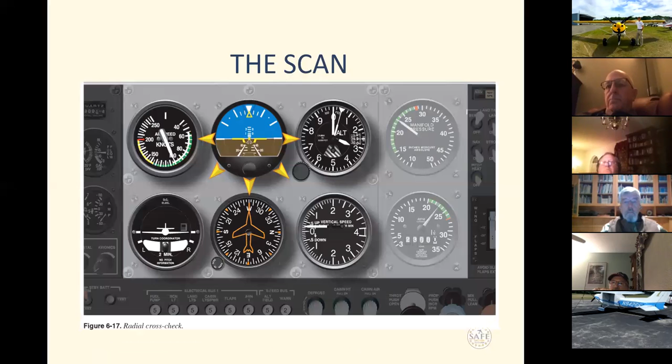It might be the radial cross-check, going back and forth. Some call this the musical checklist. This includes altitude and heading as well, and coordination, airspeed. That's certainly a little bit better.

It might be the rectangular cross-check. The fact of the matter, all of these things are designed to keep the non-instrument rated pilot safe if they have an unintended IMC experience. The problem is, in the training, we don't really get quite often to the scenarios.

I'm also an examiner, Dan. I don't know whether you mentioned that or not. I am an examiner, and on many private practical tests, in fact all of my private practical tests, I create a scenario for the IMC work, for the hood work that they're going to have to do.

I create a scenario that is very typical of what we've seen in the databases of how people inadvertently get into IMC. Typically lowering ceilings, lowering visibilities. The pilot is endeavoring to get to their destination, whether it's get home or wherever they might be going. They're slowly descending, the visibility is getting worse and worse and worse. They realize they go any lower they might hit something, they level off, and now they're inadvertently in the clouds.

The typical response that is taught by virtually every instructor is to do a 180-degree turn. That is what has been taught for years and years and years.

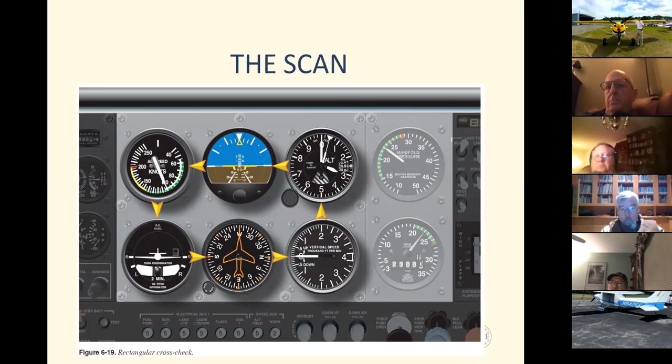I'm happy to say that the FAA finally - it took a lot of fighting from me and a lot of arm twisting - but I got them to agree that we really need to consider what I consider the most important things to stay alive if you have an unintended IMC encounter. I call them the 5 C's.

The first thing, get calm. Typically, and I think many of you might have seen the AOPA video, it's a great little video called 178 Seconds. That's about how long it takes for a pilot to lose control. The important thing is to stay calm, take a couple of breaths, get on the gauges, and get control of the airplane. Get straight and level, get it trimmed up.

The next thing is, we all know that there's nothing as useless as altitude above us, runway behind us, and fuel still left on the ground, but there's nothing as useful as altitude below us. Add power - if you're trimmed up, adding power will create a climb. Back as a student pilot, if you were really taught properly to do constant speed climbs and descents, nothing about rates, all you had to do was constant speed. If you were trimmed, trim will maintain an angle of attack.

In level flight, our thrust equals our drag, our lift equals our weight - there we have level flight. If we just increase power, that excess of power will lead to a climb at a constant speed. So climb, get away from the terrain. That's the first thing you need to do after you've gotten control. Get straight and level, trim, add power, the airplane will climb. We don't have to worry about rate, about Vx, Vy, anything like that. Adding the power will get the airplane climbing.

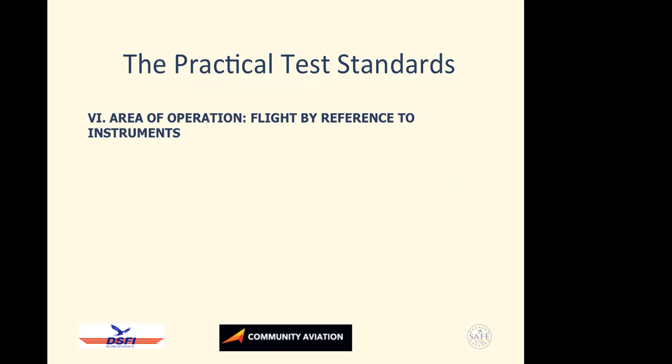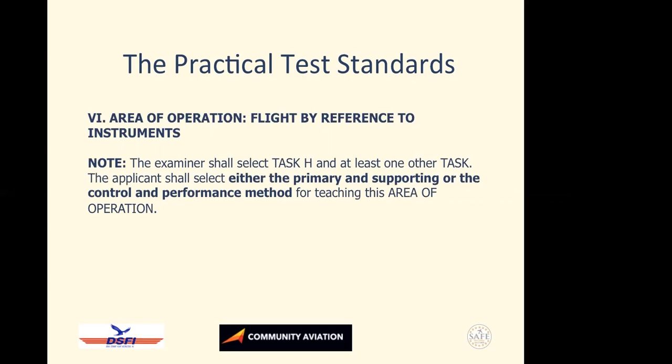But the practical test now for the instrument instructor says that for flight by reference to instruments, they have to teach either the primary and supporting technique or the control performance method. I've found that many pilots, and sometimes even instructors seeking the instrument instructor rating, are not sure exactly what primary supporting or control performance methods are. So I'd like to run through those pretty quickly here, okay?

For primary supporting, as an example, here's our 6-pack of instruments plus some power instruments. For straight and level flight, what is the primary instrument that we need to sustain straight and level flight?

So many people on a practical test with me, whether it's for instrument or even for the instrument instructor, will say the attitude indicator, because that's probably what you were taught back when you were a student pilot. But the fact is we have to maintain altitude when flying instruments. Thus, the altimeter becomes the primary instrument for pitch in straight and level flight. It is supported by the attitude indicator, the airspeed indicator, and the vertical speed indicator.

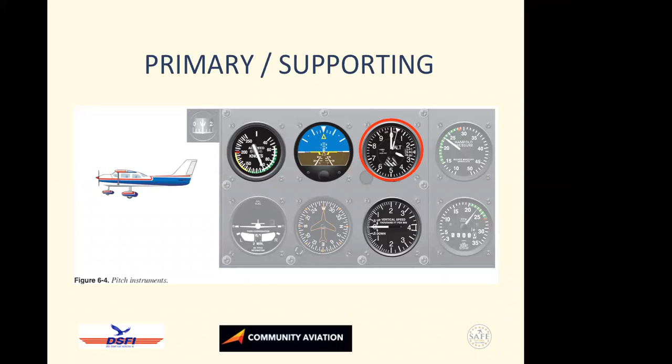What about bank in straight and level flight? Again I hear the attitude indicator, again referencing back to what they learned as a student pilot. But the fact is we have to maintain a heading, whether it's in vectors or to stay on an airway. The directional gyro, the DG, the heading indicator, or the HSI is the primary instrument for bank in straight and level flight. It is supported by the attitude indicator and the turn coordinator.

When we get to primary instruments for power, it's either the manifold pressure gauge if you have a constant speed prop, or just the tachometer if you have a fixed pitch prop. It is supported by the airspeed indicator.

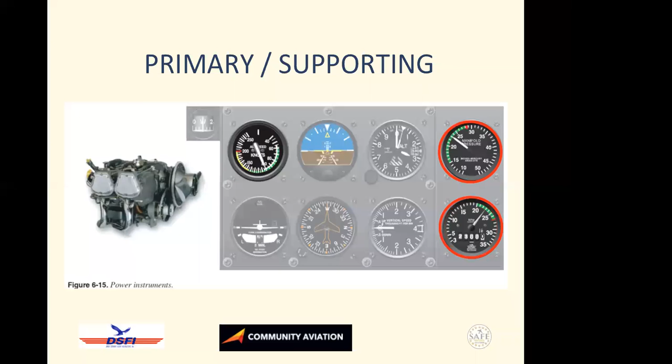And when it comes to trim, well, we can trim in 3 different axes depending upon the airplane. If you have a Cirrus, or you're flying a multi-engine airplane, you're going to be able to trim your ailerons. But for most of the airplanes that the majority of us are flying in single engine GA, we can trim the elevator, we can trim the rudder. The primary instrument for trimming the elevator is indeed the attitude indicator.

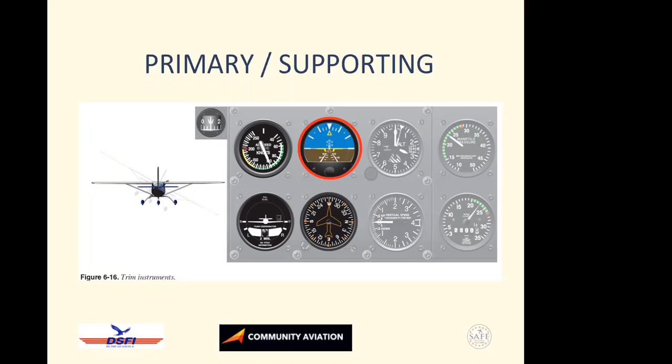Finally, the attitude indicator is primary for something. So the attitude indicator is primary for trimming the elevator, and the inclinometer—that ball down there, or the sailboat if you're flying with glass—is primary for trimming the rudder, or for yaw. If you do have aileron trim, as you might in a Cirrus, again the attitude indicator will become primary for that. Supporting these trims are both the airspeed and the DG or the HSI.

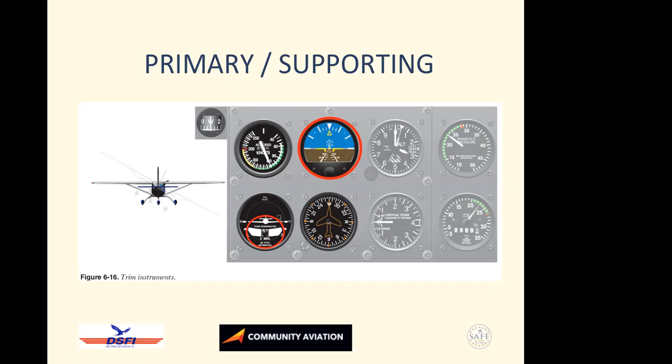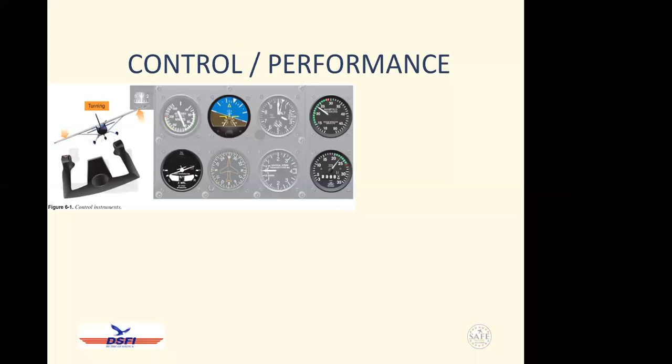So now what about control performance? What are we talking about there? Primary control instruments are the attitude indicator, the turn coordinator, and our power instruments, manifold pressure and tachometer. Our primary performance instruments are the airspeed indicator, the altimeter, and the vertical speed indicator.

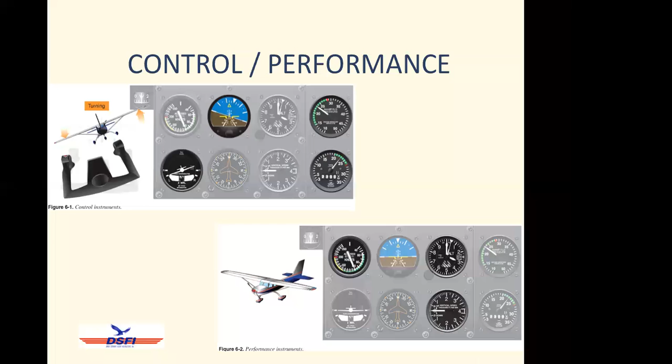But to do control performance, we also need to know the numbers. And it's surprising to me that I have instrument applicants for the instrument practical test to get their rating who don't know the numbers for their airplanes.

The other thing is, many of you might know that I conduct instrument training trips up and down the East Coast. One of them is called the East Coast IFR Experience. It's a 5-day trip starting at Columbia County.

We go all the way down to Florida, come all the way back up the coast to Maine, to Bangor, and then back to Columbia County. When pilots are coming in their own airplanes, which I highly recommend, because that's what you want to train in, do you know the numbers for your airplane?

I can kind of see deer in the headlights when I ask pilots this personally. They don't know what I'm really talking about. But with the numbers, what I'm talking about is that every combination of pitch, power, and configuration will yield a known performance. It's irrefutable. This is physics, okay?

As an example, for climbs, when I want to climb in my Cardinal, my power is always going to be set. I fly climbs with wide open throttle. I do fly a turbocharged 182, a T182T. There, I have a limit on wide open throttle of 5 minutes, and then I have to pull the power back.

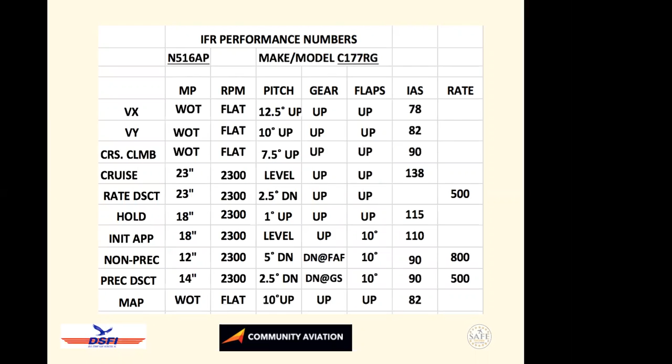Perhaps you're flying an airplane with a fixed pitch propeller, such as a 172. And here's a matrix for the 172. You might see that it says sim, and I borrowed this courtesy of a very wonderful young instructor by the name of Ryan Koch. He's with pilotworkshops.com. He has a great program called IFR, The Missing Lessons. I highly recommend that course to virtually everyone, whether you're an instrument pilot, working on the instrument rating, or especially if you're working on the instrument instructor. It's a fantastic course to look at. At any rate, here we see the different ways that we can configure our airplane, the power settings that we'll need, the pitch settings, and the different kinds of performance that they would yield.

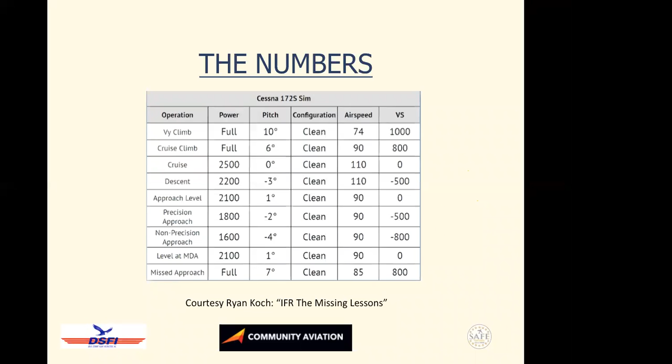So now I come back to which do you use? The PTS said either primary, supporting, or control performance. And I gotta say, what a crock. Because the fact of the matter is, I use them all, and I certainly teach them all. Primary, supporting, control performance, the answer is, it depends. And it depends upon what I want to achieve.

So I just talked about it as an example. If I want to achieve a best rate climb, I know what to do. If I want to descend when I'm on an approach, we'll use these. And as we go through this program, at the end, I'll be showing how I use all of this to fly an approach in Columbia County. But this makes me think that one of the more critical times we really have to be aware of all of this is in the missed approach. The missed approach is a very dangerous time in an IFR flight. Many pilots have come to grief, losing control in the missed approach.

It's perhaps the most dangerous time of an IFR flight. So what I'd like to do is show you a video from my East Coast IFR experience of a missed approach. This is going into Martinsville. It was the first day, the fourth approach of the first day of the East Coast IFR experience. Let's take a look and see how we use those numbers.

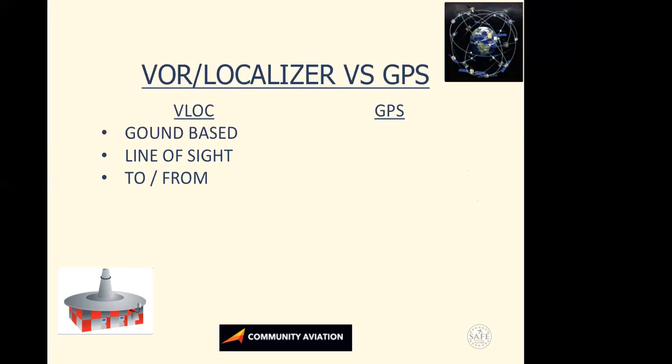And we could navigate to or from a VOR, or for that matter, a localizer. For those of you who've been flying IFR for a while prior to GPS, quite often to get established on a localizer or an ILS, even a VOR approach, we might fly to an outer marker, a co-located outer marker. We found our way there using our ADF—there was an NDB at that outer marker as well. We would then fly outbound with a from indication on the localizer, getting reverse sensing, do our procedure turn, and then come back in. So we could navigate to and from these nav aids.

The sensitivity of all of them was, and still is, angular—not was, they're still out there, they still work, a few of them. It's an angular sensitivity: the closer we are to the transmitting antenna, the more sensitive our needles will be. We'll get more into depth on angular sensitivity for VORs and localizers a few slides later on.

They are also, or at least the VOR, can be used as a resolver. What I mean by that is, back in the day, and for that matter even now, every once in a while I get an applicant for an instrument practical test filing slant uniform, just two VORs. So ATC might say,

clear direct the ABC VOR when able. What you would do is put in the frequency, listen to the Morse code, identify it, make sure it was the right one, turn your omni-bearing selector or your HSI until you got a TO indication on your ambiguity indicator, and then center the deviation bar until it was centered, and that would resolve your navigation problem—that would be the bearing to the VOR. We could resolve those issues.

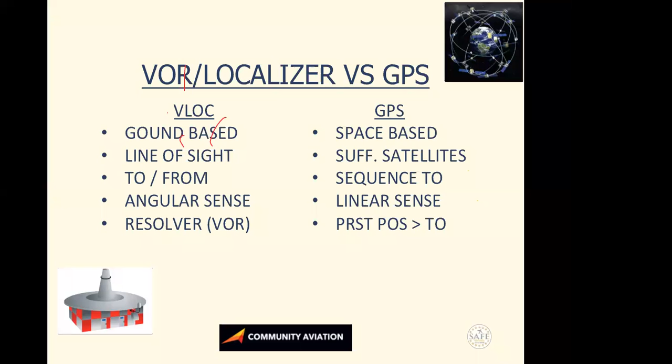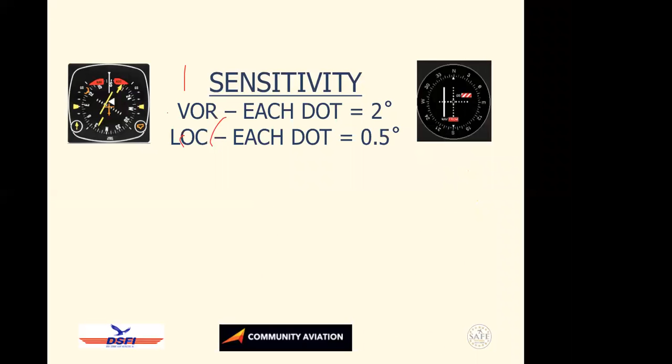So the basics of VOR versus GPS. Let's talk a little now about the sensitivity. In VOR, each dot on our omni-bearing selector or HSI typically equals 2 degrees. In a localizer, it is 4 times as sensitive - each dot is half a degree. So if we had a 2-dot deflection on the VOR, we'd be 4 degrees off course. In the localizer, we'd only be 1 degree off.

At 60 nautical miles for the VOR - and this is actually plane geometry, applicable to both VOR or localizer - at 60 nautical miles, every degree is 1 mile apart. Envision a bicycle wheel with spokes coming out of the hub - the hub might be the VOR. If the rim of this wheel is 60 miles from the hub, each spoke being a degree would be 1 mile apart. If that rim came into 30 miles, each degree would be half a mile apart. At 15 nautical miles, each degree is only a quarter mile apart.

Back in the day when I was learning to fly, I didn't have an airplane with DME. I'd always use cross radials. Quite often I'd find VORs that might be 30 or close to 30 miles offset to the side. For example, when I used to fly the VOR 13 into Bennington, Vermont, the Cambridge VOR was just about 30 miles from Albany. So when I saw I had 10 degrees to go, I'd use my number 2 nav omni-bearing selector. When I saw I had 10 degrees to get to that crossing radial across Cambridge, I'd know I was 5 miles away - things of that nature.

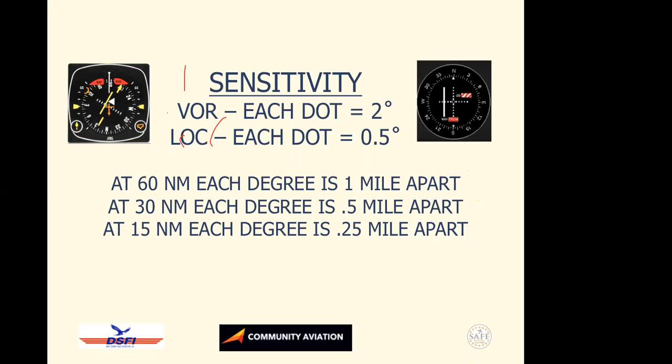So knowing this is still helpful for those of you who might be flying glass and have bearing pointers. I personally am using my bearing pointers on my Aspen all the time, and I still use this kind of stuff, even though I've got all that other information available through my GPS.

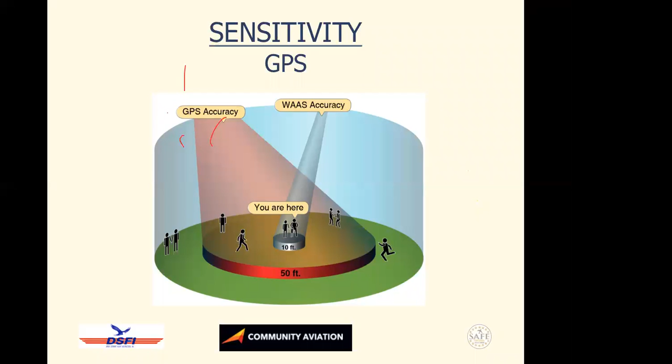Let's talk a little about GPS sensitivity. If we have a non-WAAS GPS, when it gives you a lat-long coordinate, it's actually going to have you within 50 feet of that coordinate. If we have WAAS-enabled GPS, it's only 10 feet. For those of you flying with the 406 ELT hooked up to a WAAS-enabled GPS, when it sends out your position, whoever it might be - the CAP, Civil Air Patrol, whatever - when they get to that point, they could land in a helicopter, turn 360 degrees, and they would see you within 10 feet of where they landed. So WAAS accuracy is much, much greater.

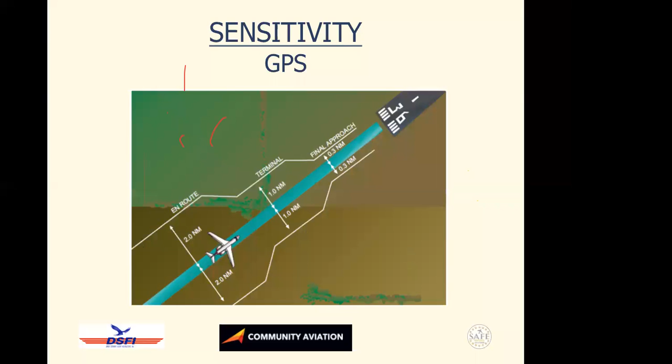Talking about sensitivity of the GPS, we have those 3 basic modes: en route, terminal, and final approach mode. It's also important to know when it's going to go into those different modes. Let's look in greater depth at what those are.

Terminal mode, which is basically where we would start in an IFR flight - when we are in terminal mode, the CDI from center to full scale deflection will show you that you are 1 nautical mile off. So from full scale left to full scale right covers a 2-mile wide course.

Question becomes, when are we in terminal mode? It is for the first 30 nautical miles of the flight if our first waypoint is within those 30 miles.

If you're a VFR pilot using GPS as a go-perfectly-straight tool, you want to fly to lunch somewhere, that $200 hamburger run to a restaurant that's 100 miles away.

When you put in that waypoint, your GPS starts in en route mode. If it's WAAS enabled, from center to full scale deflection will be 2 nautical miles, or full scale to full scale, 4 nautical miles. If you're a non-WAAS GPS, it would be 5 nautical miles from center to full scale deflection, or 10 miles width of your course.

Now again, if your first waypoint is less than 30 miles, as it will be in virtually every IFR flight, your first fix, whether you're doing an ODP, a SID, whatever it might be, I'm guaranteeing that fix is going to be somewhere between 2, 5, maybe as a max 10 miles away. Your GPS will start in terminal mode, 1 mile center to full scale deflection. When you get 30 miles away from your departure, it will switch to en route mode.

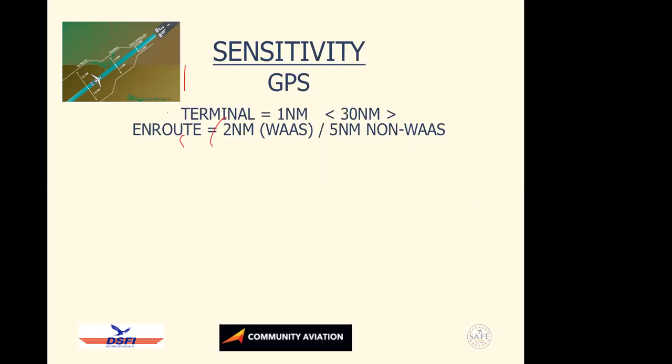The last mode we have is approach mode. There are a variety of different types of approaches we might possibly get. If you have a non-WAAS GPS, the only approach you're going to be able to get is an LNAV approach. We'll talk more about the details of these in a little bit, so hang tight.

However, if you have a WAAS-enabled GPS, there are 6 different types of approaches you could get. You could potentially get an LPV. You could get LNAV VNAV, which does require a baro-aided GPS. In all the years I've been flying GPS approaches, starting back in 1994 when I got my first Garmin 430, I've only flown 3 LNAV VNAV approaches.

So LPV, LNAV VNAV, LNAV plus V, LNAV, LP, and LP plus V. That's 6 different types of approaches.

3 of them have angular sensitivity from the final fix inbound. 4 of them have vertical guidance, but only 2, the LPV and the LNAV VNAV, have vertical guidance to a decision altitude. The other 4, LNAV plus V, even though it gives vertical guidance, still goes to an MDA. Same thing with LNAV. LP is angular. LP plus V gets vertical guidance, but again only goes to an MDA. Hang tight, I'll explain why in a few more slides.

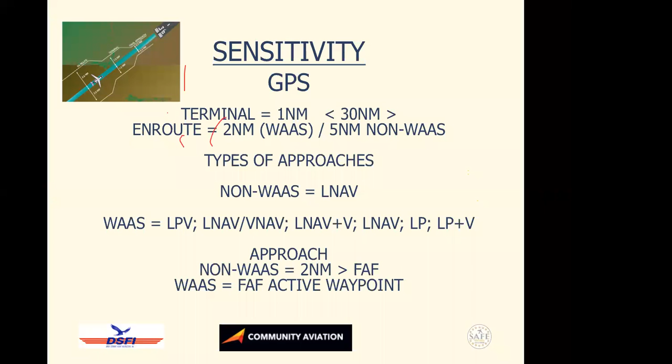So anyway, remember, you're going to find out the type of approach when the final fix becomes the active waypoint. You might have even heard me in that last video clip coaching Billy, saying, well, when are we going to find out? And he said at Luigi, well, no, that was not the final fix. When we cross that, the final fix becomes the active waypoint, that's when we would find out.

I'd like to now compare the localizer with the LPV, localizer performance with vertical, or localizer precision with vertical. On virtually every instrument practical test that I give, folks who are anticipating come to me for a practical test, take your notes now and you won't miss this question.

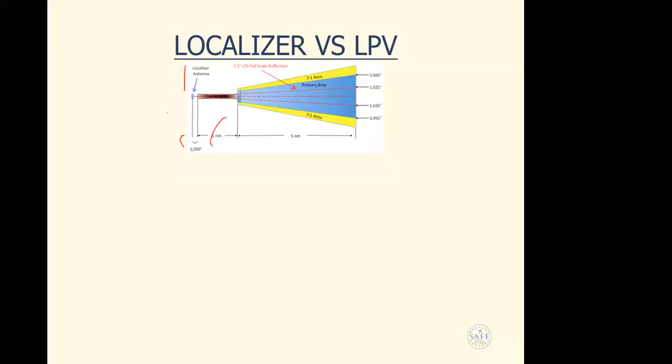How wide is the localizer at the threshold? There's only one answer to this. You can't hem and haw. The localizer is designed to be 700 feet at the threshold. This is applicable not only to a localizer and or ILS, but also to the LPV and the LP and LP plus V approaches. Those needles, when you get down to the threshold, from full scale deflection left to full scale deflection right, going to be 700 feet, 350 feet either side of the localizer.

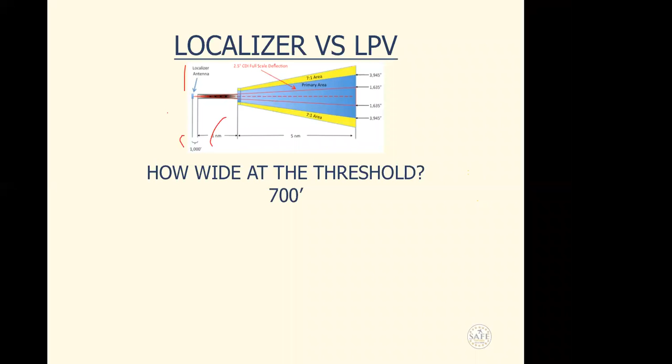So my next question in the practical test says, well, how wide is it going to be at the final fix? And I typically kind of see deer in the headlights, kind of wondering about this one. Yikes, gee, I don't know. And if they were wise, they'd say, well, it depends. And it depends whether it's a localizer or an LPV. In the case of an LPV, it's always going to be fixed. I'll tell you what that is in just a second.

But for the localizer itself, it does depend on several things. Number one, it depends on how long the runway is. We have to understand that the localizer antenna is positioned at the far end of the runway that we are approaching, and it is typically placed anywhere between 500 to 1,000 feet from the far end of the runway. It now goes out angularly at anywhere from 3 degrees to 6 degrees to be 700 feet at the threshold. Well, that certainly depends on how long is the runway. We have ILSs to runways as short as 5,000 feet. We might be going into somewhere like Stewart in Newburgh. We might be going into Bangor.

We might be going into Portsmouth, we might be going into Plattsburgh. There are all these military runways that are 12,000 feet long. If it's 12,000 feet long, that localizer is going to be much wider wherever that final fix is. So the length of the runway has something to do with it. The other thing is how far from the runway is that final fix. It might very well be at an outer marker, as an example. So it does depend on how far.

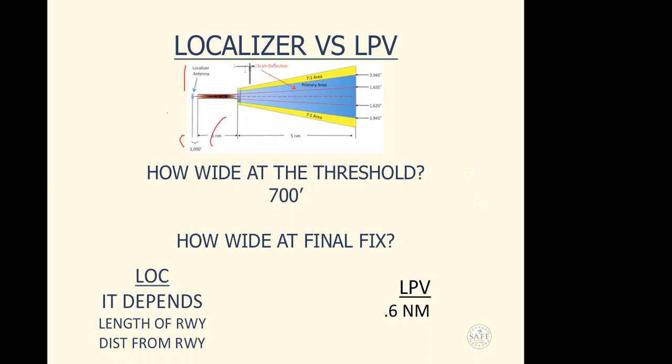It gets no narrower. What if there is a crane sitting there just a half a mile from the threshold of the runway? It is outside the angular deflection for the localizer, but it is inside that 3/10 of a mile. And if you are not keeping the needle completely centered, maybe you got a 3.5, 4-dot deflection, in the localizer you'd still be protected, but if you were flying an LNAV, you would not be protected.

Maybe it was a tree, and you could easily run into those obstacles or obstructions. In the LP plus V, the purpose is that you might have flown an ILS that has a visual segment that finishes the approach. So the LP plus V is very similar to that.

An example, I just flew one the other day in IMC, right down to minimums. The RNAV 11 into Great Barrington is an LP plus V. But we have to fly it to an MDA, because if we continued down the glide slope, we would run into those big spruce trees just beyond the approach end of runway 11. So it's a visual segment, and that's the purpose for the MDA on the LP plus V.

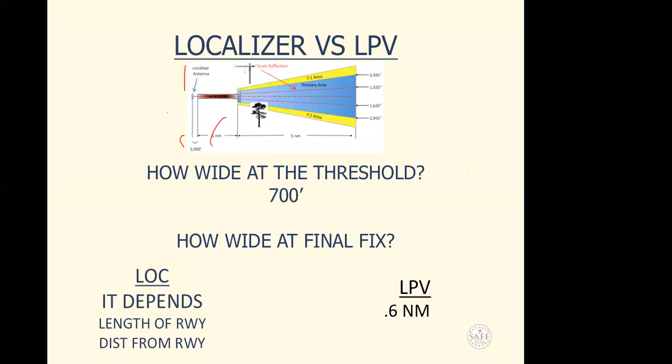It's angular, just like an LPV, but you've got a visual segment to conclude the approach. So you have to level off at an MDA and continue until you have the runway environment to conclude the approach. Now I'd like to get into how I brief an approach, and how I use all these tools to fly one.

What I'm going to use is the RNAV 3 into Columbia County Airport. Let's say I'm coming in from the west. I had filed, maybe from Binghamton, Victor 270 to Athos intersection. Athos intersection is right there. So Victor 270, Athos, direct Columbia County. Starting out well to the west of the airport, even though it's my own airport, I'm going to be briefing that approach.

I'll still be talking to Boston Center, briefing the approach and planning out what I want to do, hoping that by the time I get to Athos I'll have been handed off to Albany, and I'll give them a request as soon as I'm handed off. So I'm back out to the west of Athos, still in Boston Center, and starting to brief the approach.

Before I get into this, I want to say I'm using a Jeppesen plate, and I know a lot of you don't — you use NACO because it's free with ForeFlight, which is wonderful. I pay the extra money for Jeppesen for several reasons. The first is the briefing strip. Jeppesen was the first to come up with the whole concept of a briefing strip. A wonderful gentleman named Jim Terpstra designed this briefing strip.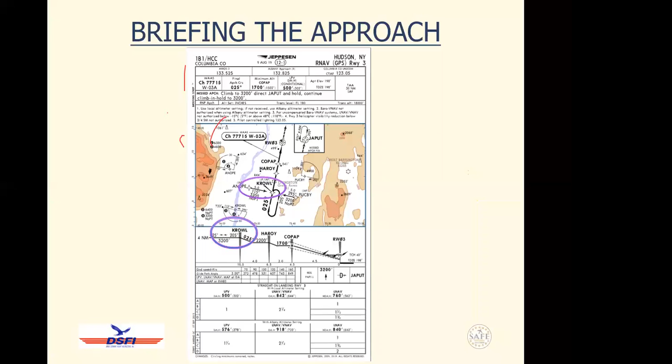The next thing I might look at is, in this case, there is a terminal arrival area. And I see, looking at that coming in from the west, out 30 miles, I'm going to have to be up at 6,300 feet. I can't get any lower than that until I am 7 miles from Anope, the initial fix. It's because of the Catskills and because of the terrain, and also because we're probably going to be off route at that point. I know that as I come up to Agnes, I'm going to be requesting direct Anope.

Anyway, going back a little bit, so I'm still back west of Agnes. I've briefed everything out. I've set up my vertical speed to reach Crowell, and we'll talk about that in just a little bit more, to reach KROWL at 3,200 feet before I get there. I'm anticipating it. When I am handed off to Albany from Boston Center, my frequency is already in there.

I bring it up. It is important that I let them know, the final approach controller, that I have the 1 minute weather, what we call the AWOS, and my request. What approach am I requesting? If we don't give that, they're going to say, do you have the 1 minute weather? What approach are you requesting? So if I was handed off to Albany, Cardinal 516 Alpha Papa, 7,000, we've got the 1 minute weather at Columbia, requesting direct Anope for the RNAV 3. I've given them my request. I might not get it yet, but they know what I want. They know I want to go to Anope.

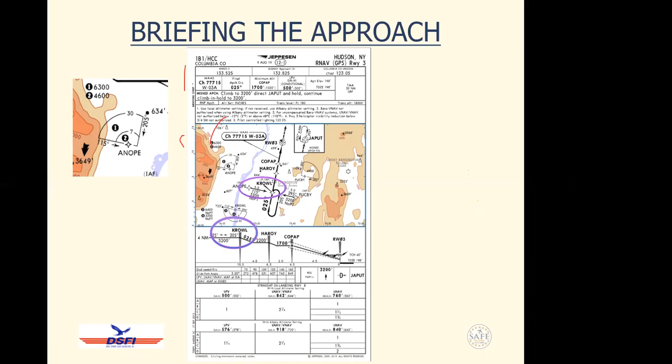In preparing for this, I'm going to go here. This is a simulator for the 750. In my Cardinal, I actually have a 430, but the displays look the same.

I have already set up my vertical navigation to be 2 miles before KROWL at 3,200 feet. The GPS is going to constantly compute, predicated upon my current ground speed, in this case 120 knots, that I would need 640 feet a minute to reach 3,200 feet 2 miles before KROWL.

Typically our clearance from Albany would be clear direct Anope, cross Anope at or above 3,200 feet. If they said at 3,200 feet, I'd have to really come down maybe 800 to 1,000 feet a minute, dependent upon how hard that west wind was blowing to get down there. It's going to hurt my ears. But I don't have to be at 3,200 feet at Anope, I was cleared at or above. So I set my vertical speed for that.

Also notice, if I were hand flying, my desired track from my present position when I was cleared direct Anope is 161 degrees. I am also tracking. These are the two pieces of information I will have in a 430 or a 650. If my desired track and the track are the same and my D bar, my course deviation indicator, is centered, it's not going to move.

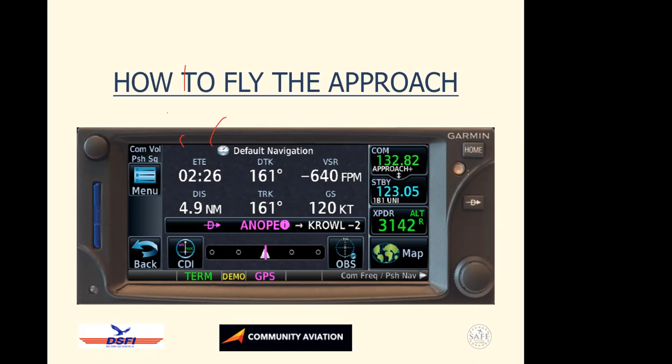I'll gain an inch in that 1,000 feet of descent. So as I level off 2 miles before KROWL, my manifold pressure will be at 18 inches. I will slow to 115 knots, well below my 130 knot speed for flaps. Put in my 10 of flaps will then slow me down to 105, and now I'm prepared, ready to make the turn at KROWL.

So what happens at KROWL? Well, at KROWL, I'm going to have to turn and descend down to 2,200 feet. So I need to know, where am I going to look when I get to KROWL?

Because my GPS is going to count this down for me. It's going to come up when I've got about 10 seconds to go to KROWL, to come up and say next desired track 025 in 10, 9, 8, 7, 6, 5, 4, 3, 2. Turn now, desired track 025. When it says turn now, the algorithm is predicated upon flying a standard rate turn.

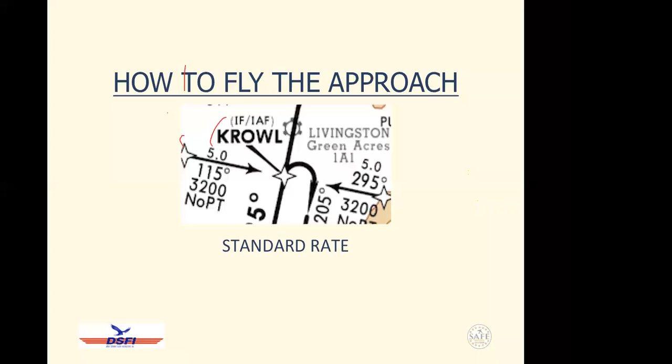Well, how do I know what will yield a standard rate turn? And I got to say, folks, for as numerically challenged as I am, this one is pretty easy. In order to fly a standard rate turn, where I'm going to look is at my attitude indicator, because I have learned that if I know my ground speed, I can find out my bank angle, and the formula is very simple: take your ground speed, divide it by 10, and add 5.

In the scenario above, we were doing 120 knots. As I leveled off and my power was adjusted, I'm going to bring power back at 18 inches. As I level off, I'm doing 120 because I've got a tailwind. I divide that by 10, that's 12. I add 5, 17 degrees of bank.

When it says turn now, I look at my attitude indicator. I roll to 17 degrees. Do I have that precision as a pilot? No, I don't, but I'll roll just a little bit more than halfway between the 10 and the 20.

I know I also have to descend, so I'm going to, still looking at the attitude indicator, pitch down 2.5 degrees, reach over to my throttle and pull my power back to 14 inches. This will give me approximately a 500 foot per minute descent at 105, my initial approach speed.

I'll then look at how much time I have to HAROY. I can do this math. I've got 1,000 feet to lose from 3,200 to 2,200. If I've got 2 minutes, 500 feet a minute will work great. If I've got less than 2 minutes, I'm going to need more than 500 feet a minute. If I've got more than 2 minutes, I don't quite need 500, but I'll still go for 500 feet a minute to get down there.

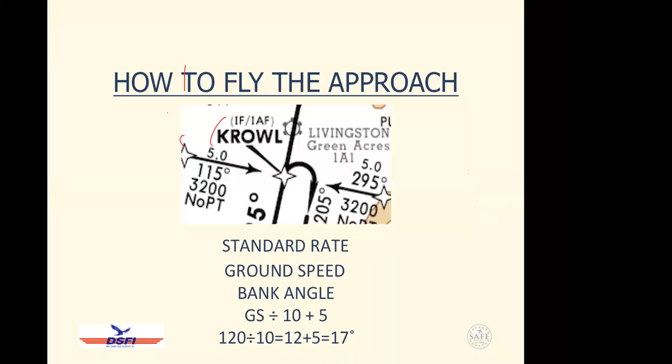I know that as I cross HAROY, it's going to switch to approach mode and I'll see my glide path. In this instance, I'll be right below the glide path because there's only a little more than 2 miles from HAROY to COPAP final fix. As soon as that glide path centers, I'll drop my gear, pitch down 2.5 degrees, pull my power back to 14 inches, and continue down my approach anywhere between 90 to 95, which has me below my VFE for 20 degrees of flaps and 95. Knowing where I am, where I'm headed, what has to happen when I get there, and how I'm going to be prepared makes flying this approach really pretty simple.

What I'd like to do now is show one more approach. This is an approach into Hagerstown, the RNAV 27, that we did during the approach. This approach is actually the lunch stop on the first day of the IFR East Coast IFR experience.

6 Alpha Papa, contact Potomac approach 126.82. 12682, thank you, 516 Alpha Papa. 944 Charlie, Potomac approach, climb and maintain 4,000. Get to 4,000 now, King Air 44 Charlie. Potomac approach, Cardinal 516 Alpha Papa, 6,000, request Zupox for the RNAV 27, full stop. 516 Alpha Papa, Potomac approach, direct to Zupox for the RNAV 27 in Hagerstown. You said you had the weather? Got the weather, 516 Alpha Papa. Oh, that's one. Yeah, there you go. Activate approach, thank you.

Okay, so now our VSR is correct. Yes.

6 Alpha Papa, climb and maintain 5,000. Climb and maintain 5,000, 516 Alpha Papa.

He's using autopilot here, but basically for hand flying, I pitch down 2.5 degrees, pull my power back to 14 inches, and maintain that speed, constant speed. Take an inch off.

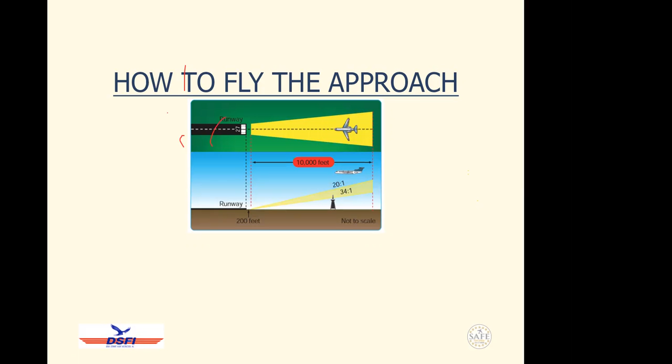So let's talk a little bit, we're almost to the end here, about how to fly an approach. What I'm talking about are the controls that we use to fly an approach. For example, to maintain the localizer, to stay on the center of the localizer, do we use aileron or rudder?

And I hate to say it, but I see more pilots than I really want to see come for a practical test or come for training with me, who've never trained with me before, that are trying to skid down a localizer. Folks, it just unstabilizes everything. As we yaw the airplane, it affects our speed, it creates more drag, et cetera.

For those of you who have an autopilot that will fly a localizer, I'm sure you don't have a 3-axis autopilot that's controlling the rudder as well. The airplane will fly the localizer with roll alone. Even in the Cardinal I had before the one I have now, I had an S-TEC 30 autopilot. It only had high sensitivity or low sensitivity nav, but it would fly an approach in high sensitivity, and it did it solely with roll, okay?

I remember years ago hearing Wally Moran, one of my peers at pilotworkshops.com, giving a presentation on flying an approach. And of course, he always talks about syncing the heading bug to the reference heading. When I'm flying an approach, if my desired track and the track are the same and my D-bar is centered, I have synced my heading bug. I might be holding 10, 15, 20 degrees of correction, but I've synced that heading bug.

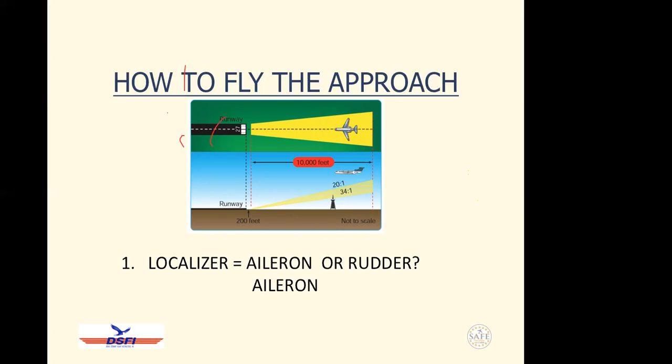So flying a localizer, we use the aileron. To maintain the localizer, we use the aileron, we roll. What about the glide slope? Do we use elevator or throttle?

I see a lot of pilots are trying to fly the glide slope or the glide path using their throttle. This is what they were taught as a student pilot learning to land the airplane. But it's not how we fly an approach, okay? We're going to use the elevator to stay on the glide path. And I'd like to get into this in a little bit more depth and a little bit of minutia, if I might. So please humor me, okay?

When we were learning as student pilots to land, we wanted a stabilized approach, which meant on spot, on speed. The same thing for an instrument approach. Definitely from the final fix, if not sooner, we want to be at a constant speed on a constant glide path. Now, it might be a non-precision approach, so we still keep constant speed, okay? If it's precision, we want to stay on the glide path. To stay on that glide path requires a rate that is totally dependent upon our ground speed.

We might end up having to fly an approach with a tailwind. The faster our ground speed, the greater the rate it will be required to stay on this glide path. It might be a 3-degree glide path, it might be a 3.5-degree glide path. I remember once, there was never really a published glide path, but there was a single light VASI into Great Barrington. It was set at a 4.5-degree glide path, so that if you picked it up outside of East Mountain, you wouldn't run into East Mountain coming in.

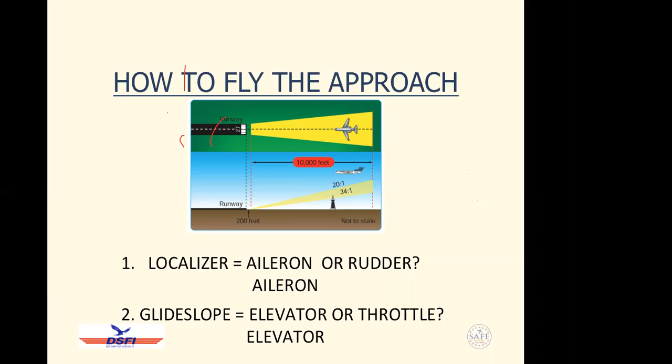I defy anyone to maintain that kind of accuracy flying a glide path using the throttle. We use the elevator to stay on the glide path. We use the throttle to control the speed. And that's how we stabilize an approach.

The last thing I want to get into, and this applies to everyone even if you are not an instrument rated pilot, has to do with recoveries from critical attitudes. This is another area where I see bad instruction. Every pilot on a practical test, whether sport pilot - well, sport pilot really doesn't have to do that - but private pilot, instrument pilot, commercial pilot, has to do a recovery from a critical attitude. And the ones that kill us typically are those spiral dives.

We have to remember that when we lose control, there are several reasons for it, but primarily an airplane does not have what we call spiral stability. Engineers have not yet figured it out. Cirrus has tried to address this by spring loading their controls. It helps a little bit, but it's not really all that great. And they know as pilots, we're not all that great, so they give us a level button - just push the button and it'll level off. Many of us don't have the luxury of that button.

Let's think a moment what trim really does for us. What does trim really maintain? Everyone will say, oh, we use trim to relieve pressure on the control yoke. That's how we use it. But what it really maintains is an angle of attack.

We've got four forces of flight going on: thrust, drag, lift, weight. In steady state flight, not necessarily level, but in steady state flight, those four forces are equal. Let's take level flight. Let's say you're in your Skyhawk, your power's set around 2,400 RPM, you're trimmed up for level. Thrust and drag have equaled out, lift and weight have equaled out, and you're indicating 110 knots.

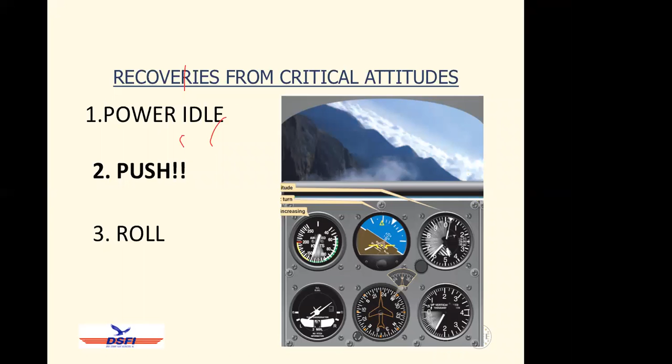Recovery from a spiral dive where you're accelerating: power to idle to minimize the acceleration. Push—not push hard to go negative, but push as you roll—to keep that airplane from pitching up violently. As the airspeed slows down to a normal speed, or even before you get quite to cruise, you can now allow the nose to come up, or perhaps even pull it up, and perhaps add power. But remember, the important thing here is as you roll, push to keep the airplane from pitching up.

So in summary, the things we've covered tonight have been the basics. We've talked about the basics of instrument attitude flying, control performance, primary and supporting instruments, things of that nature. We've also talked about situational awareness—where to look, when to look, what to see, and what to do predicated upon what you see.

So that brings us to the close. We will open this up to questions, I believe. Glenn, that'll be up to you. I'm going to jump out of this in just a second and stop sharing the screen.